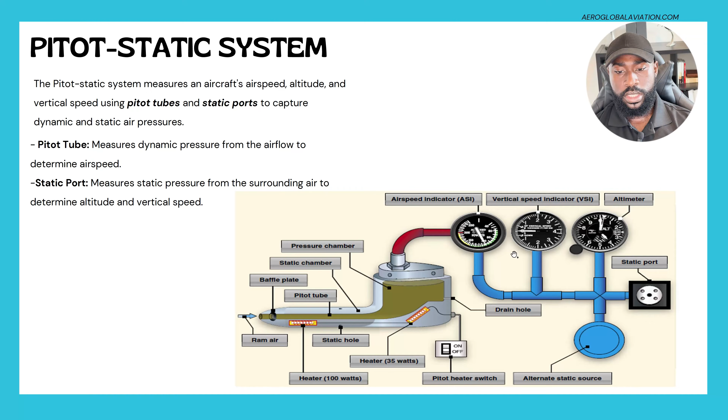Some aircraft have multiple pitot tubes just to measure the dynamic pressure from the airflow to determine the airspeed of the aircraft. For the most part, the pitot tube is used for the airspeed indicator, while the static port measures static pressure from the surrounding air to determine your altitude and vertical speed. The static port is connected to all three instruments, but the pitot tube is only connected to the airspeed indicator. So it's very important for you to know this.

Now we're going to start talking about each specific instrument in the Pitot Static System, beginning with the airspeed indicator. A few important things to pay attention to are the colors — they tell you something about the airspeed indicator, which as a pilot will make your life a lot easier when flying. As usual, you should always be scanning your instruments.

Whenever you're within the green range... I'll start by talking about the white arc. This is the flap operating range. Whenever the needle on the airspeed indicator shows you're still within this white range, then you can use your flaps.

But usually once you start exceeding this range, you want to make sure your flaps are not down at any point in time, because at that point it becomes dangerous.

Your green arc is your normal operating range. Your yellow arc, basically a caution range, so you really do not want to fly there unless you're in smooth air. And even when you're in smooth air, you still want to apply caution.

And then you have the red line here, which is your never exceed speed. So over here we also have a picture of what the airspeed indicator looks like under the hood. I'll give you a quick overview of how it works in general.

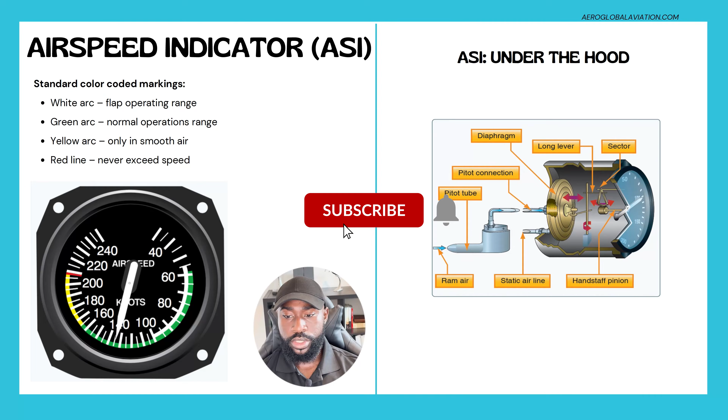And then you also need to know your different V speeds. Regardless of whatever aircraft you're flying, you always have a VSO, which is your stall speed in the landing configuration, determined by the lower limit of the white arc. That's your VSO. Your VS1 is your stall speed in a specified configuration, which is clean, so with no flaps. Landing configuration is considered with flaps, clean is considered no flaps.

So the lower limit of the green arc is your VS1. And then you have VFE, which is your maximum flap extension speed, the upper limit of the white arc. Once you exceed this speed, you do not want to have your flaps extended.

And then you have VNO, your maximum structural cruising speed. The boundary between the yellow and the green arc is your VNO. Then VNE is this red line right there, basically your never exceed speed.

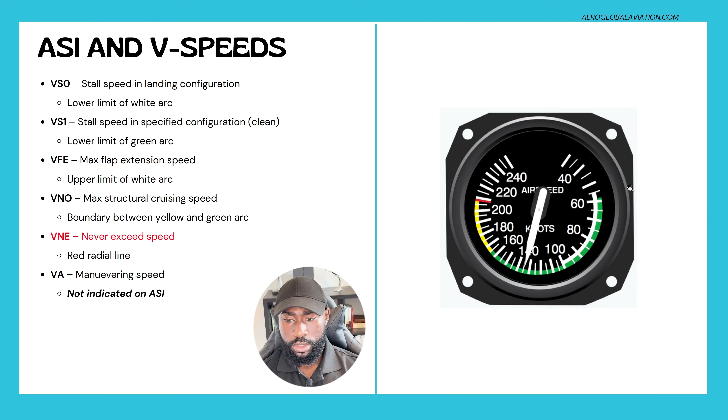And VA is your maneuvering speed. Your maneuvering speed is not typically depicted on the airspeed indicator, but your POH will give you a range for it. So it's important to always know what your maneuvering speed is. Usually there's a way to calculate that based off the weight of the aircraft, but I won't go into too much detail. You can talk to your instructor to make sure you understand how to calculate or reference that in the POH.

And then we have the altimeter here, which is the next instrument that's part of the Pitot Static System. The altimeter basically senses pressure from the static port, so it mostly just uses the static port.

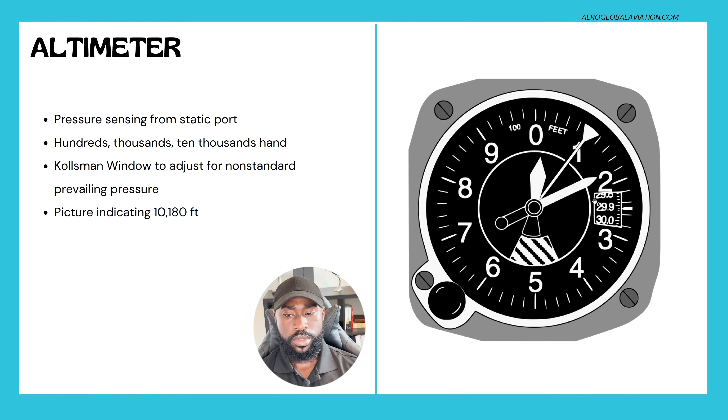If you're flying an aircraft with traditional steam gauges, this is what it looks like. It has hands, it looks like a clock. It typically has a Kollsman window that helps you adjust for non-standard prevailing pressure. Before you fly, you want to get the current pressure setting for the airport and set that in the Kollsman window, so you get the appropriate altimeter reading for your aircraft.

And then over here we have what the altimeter looks like under the hood. These pictures are also in the PHAK, so you can go to the system section and read through to see how the systems work, or watch specific YouTube videos that give a good pictorial representation of how everything works.

So we have the static port here connected to the case right here, and inside the case there's something called an aneroid wafer for the altimeter.

The aneroid wafer basically contracts or expands depending on how much pressure is inside this case. Depending on how it contracts and expands, it moves these levers to show you whether you're climbing or descending. So that's how the altimeter works essentially.

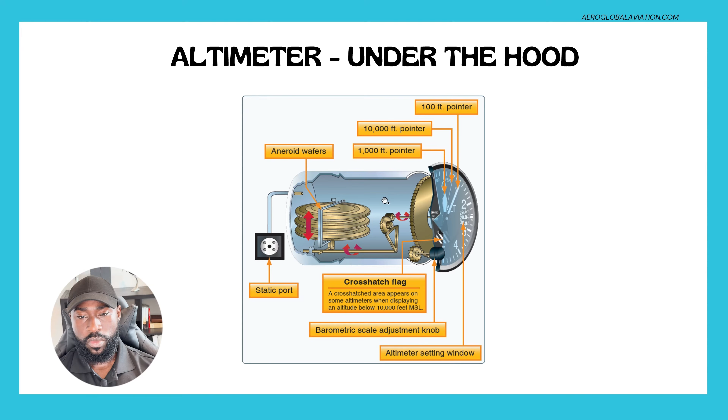Next we'll talk about the different types of altitude. Since we're talking about the altimeter, it's important to know we have different types of altitude we reference in aviation. You have true altitude, which is your actual height above sea level. Then you have indicated altitude, which is what is shown on your altimeter in the cockpit. Then you have absolute altitude, which tells you your height above the ground. And then you have pressure altitude, which is your height above the standard datum plane.

Standard datum plane is considered by the standard number 29.92. If you read from your altimeter, you can set that to 29.92 and it tells you what your pressure altitude is. Then you have density altitude, which is basically pressure altitude corrected for non-standard temperature. We already talked about this one in the performance and limitations section. So it's important to be able to tell the difference between all these different types of altitude.

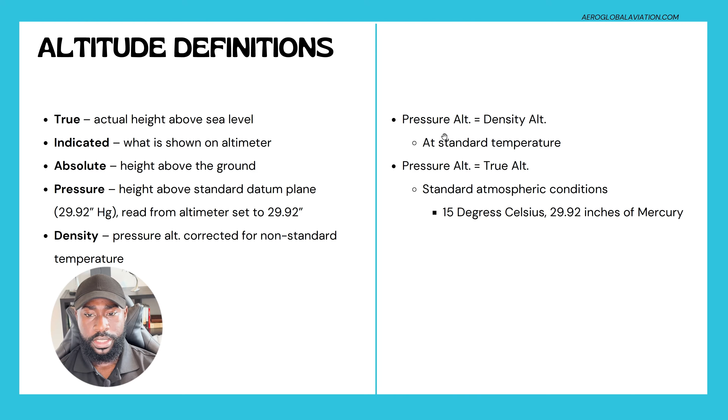I also want to bring your attention to understanding your standard atmosphere. This is important for you as a pilot to know your standard atmospheric conditions with respect to temperature and pressure. You need to know your standard temperature is 15 degrees Celsius and your standard pressure is 29.92 inches of mercury. So on a general day at standard temperature, your pressure altitude is also your density altitude.

Now let's talk about why your altimeter setting is important. As you probably already know if you're flying, there's a Kollsman window on the altimeter. It's very important to always obtain your current altimeter setting and make sure it's updated, because if you don't, your altitude may actually be all messed up. For example, if you turn your knob 1 inch higher in the Kollsman window, the altimeter will read 1,000 feet higher. You can inadvertently do this flying from an area of high pressure to low pressure weather. So there's a term that says from high to low, look out below.

This also applies to temperature. For example, if you're flying from a warm temperature to a cold temperature, if you do not adjust your altimeter setting, your actual altitude may be lower than what your altimeter is actually showing you. So it's important to update your altimeter setting and understand how that works.

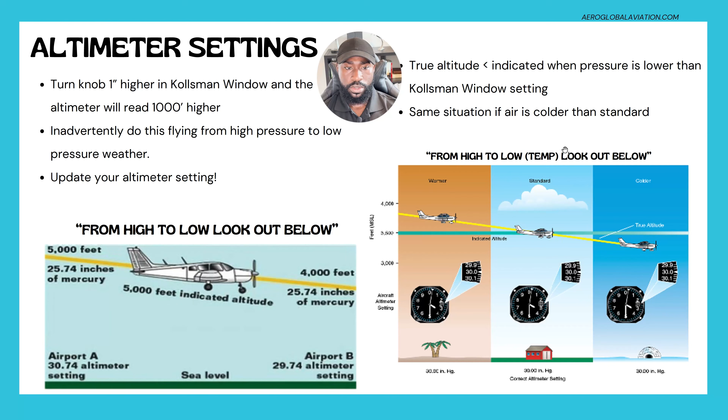The next instrument we'll talk about, which is the final instrument connected to the Pitot Static System, is the VSI. Your VSI basically indicates your rate of climb or descent in hundreds of feet per minute. It usually has a slight lag due to the delayed effects of the calibrated leak.

That difference is basically what shows up on your VSI that tells you whether you're climbing or descending. Just remember there's a slight lag due to the delayed effect of the calibrated leak. So your VSI is always a little bit slower. For example, if you start climbing, it will show you're climbing, but just know there's a lag in what it shows.